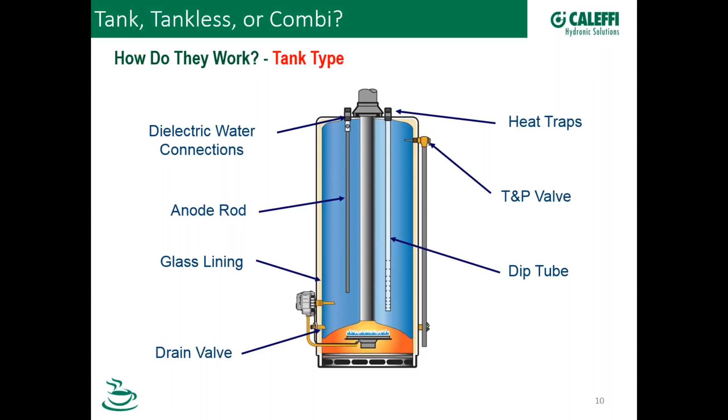One of the questions was, well, are you going to talk about heat pump water heaters? Well, I sure can. Heat pump water heaters are emerging. They're a little bit higher priced, and they have very specific parameters they need to work. In general, they work much like the refrigeration process in reverse, so instead of rejecting heat, we're absorbing heat and then transferring that into the water. We aren't really going to be talking about this in the side-by-side comparison today, but we are going to focus on tank type, tankless, and then combis.

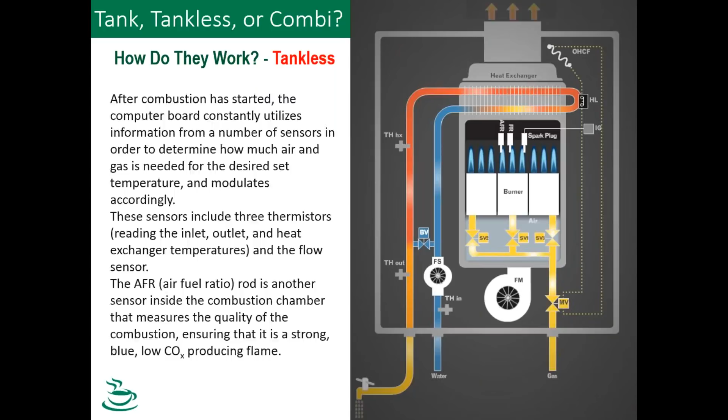Tankless water heaters, it's a singular chassis, it's got a burner. There's a lot of different makes and models, some are condensing, some are non-condensing, but they operate based on a flow rate. Once that flow rate actuates the unit to fire and says I need heat, I've got a call, let's send some hot water downstream. These are, even though it's a fairly small chassis, there's a fair amount of sophistication in there, and we'll talk about how to control them and how these actually operate.

One of the things you will hear me talk about today repeatedly is that the higher the temperature rise, the lower the flow rate. We'll talk about that in greater detail moving forward. But essentially we have a heat exchanger, the potable water directly goes into the heat exchanger where it's heated by the flame. We transfer that into the water and it goes right out to the fixture. So it is a direct fired appliance.

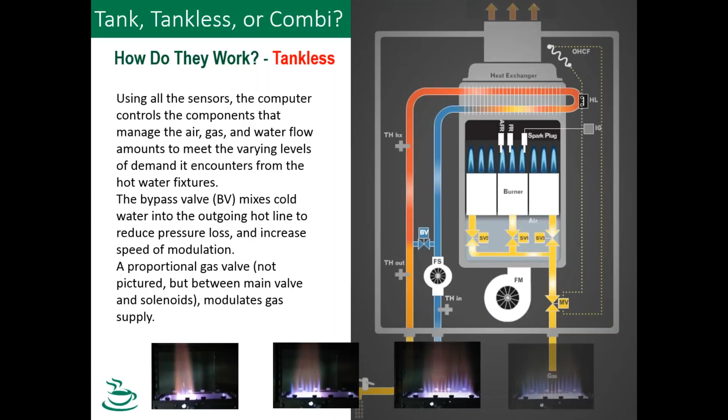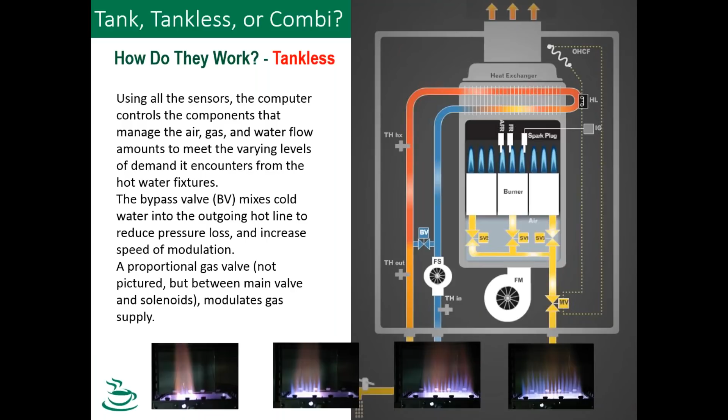This particular model, we can talk about a modulating gas valve, but some of these truly modulate and some of these have staged burners. So when we say a tankless heater, that covers a very wide spectrum, and we'll talk about specific units here in just a few minutes.

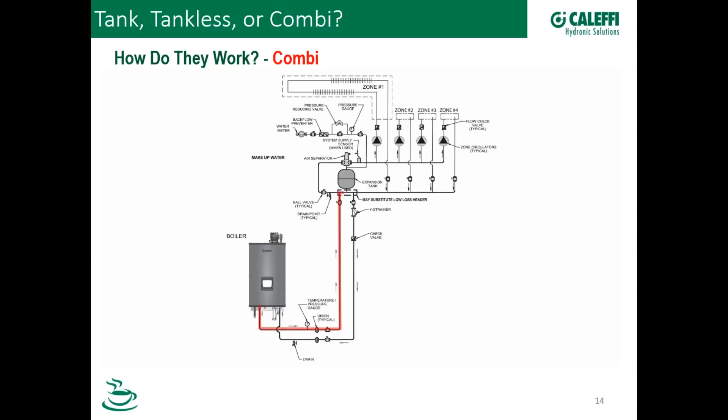And then onto the Combi. As the name suggests, a combination boiler provides both space heating and domestic water production. In this animation, on a call for heat and a space heating load, the boiler turns on, and the internal boiler pump will handle that flow. In this instance, we have it on closely spaced tees for proper primary, secondary operation, but that is how it will work as it pertains to responding to a space heating call.

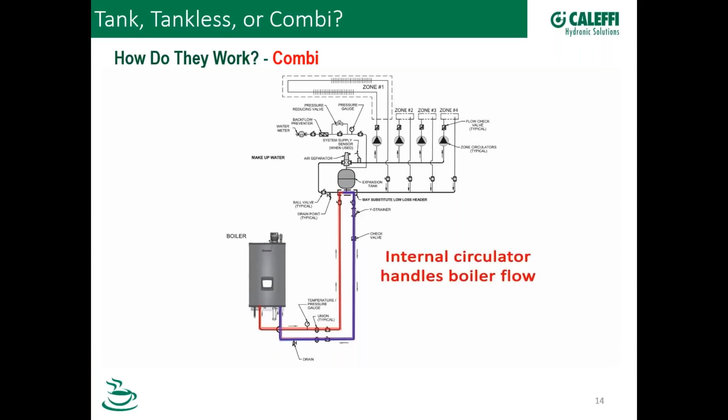Now, internal to the boiler, you will see this brazed plate exchanger and these brass valves, and there is a two-position actuator. When it actually calls for heat, you'll see that actuator spring move over to the left. As system fluid comes back from the space heating side, it will go up through the boiler via its own circulator. We'll pick up the BTUs in the combustion process, and then allow that flow to be directed right back out to that space heating load. So that is how it performs on the space heating side.

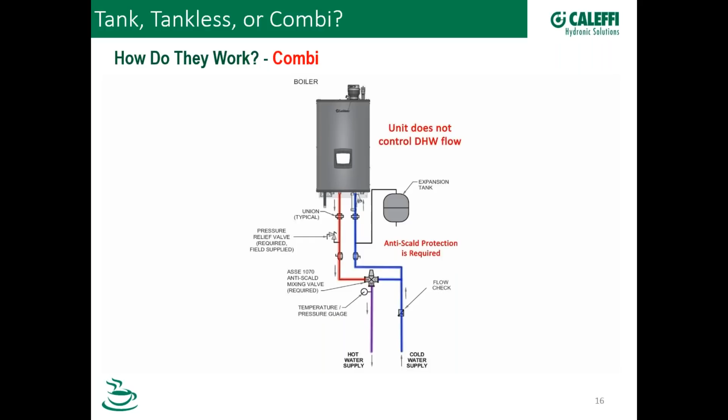Now on the Combi, on the domestic side, we will actuate a call for domestic based on a flow rate of a minimum of 0.32 GPM. So even a partially open lav faucet or kitchen faucet is going to tell the unit we need heat, and it's going to actuate flow. That same brazed plate exchanger, that two-position actuator is going to go back to the default position, and now instead of allowing flow out to the space heating side, it is only going to allow flow through the upper half of that brazed plate exchanger.

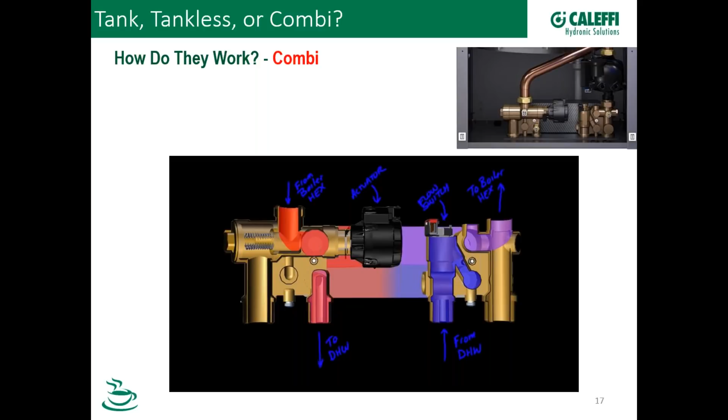So the boiler flow then becomes very circular. It goes up through the heat exchanger, down through the brazed plate heat exchanger, and we're transferring BTUs into the potable water, which is flowing through the bottom side of that brazed plate exchanger. So this is not a direct fired appliance. The potable water never touches that flame or sees a flame. We'll talk about some of the added benefits of that as well. So these three different devices work in completely different manners.

Now on to applications, and you'll see the industry really is shifting to storing water or producing water at a higher temperature so that we can stave off Legionella issues. If you're not familiar with Legionella, the bacteria, the higher we store water, the quicker that Legionella will die. If we store water at 140 degrees, 32 minutes later, that bacteria will die. And the magic number is instantaneously at 158 degrees, that Legionella bacteria will no longer continue to live.

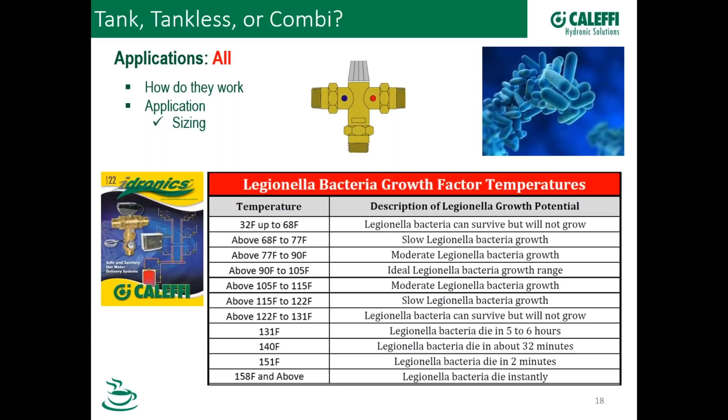So for today, we are going to illustrate the use of a mixing valve, not only on a tank, but on the tankless and on the potable side of the Combi as well. There's another reason why I'm going to illustrate this, because some of the emerging technologies out there and the components now available might play to our strengths as it pertains to recirculation, but I don't want to get ahead of myself here.

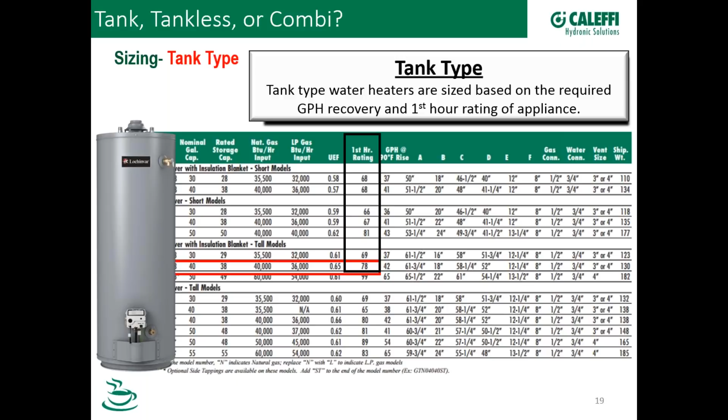So we talked about how they work, but now we're going to talk specifically about sizing. The elephant in the room for us, as it pertains to a side-by-side comparison, is we're just going to pick this model right here. It's probably the most prevalent model out there: 40,000 BTUs, tank type under-fired unit, 40 gallons of storage. So that we can compare this apples to apples, we are going to go to that first hour rating, and that is how we size a water heater. With the storage and the BTUs on board, that unit will produce 78 gallons per hour.

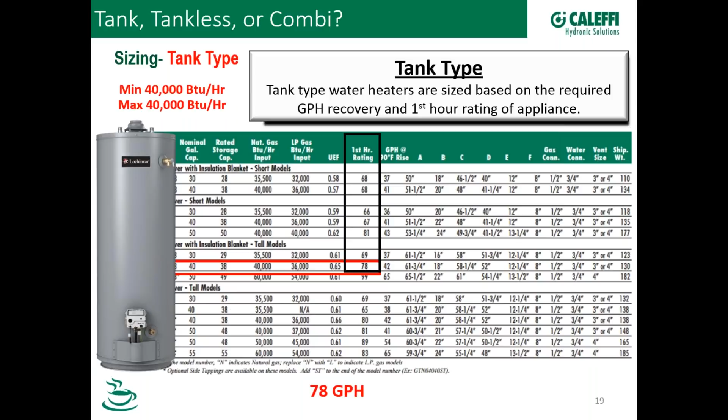Now on to tankless. Tankless is sized by peak flow rate. So we need to know what the worst case scenario is, what is that maximum flow rate for that peak load that we've got to sustain?

And for today, we're going to look at a non-condensing unit. It's 199,000 BTUs, a lot more BTUs there, and it's going to heat a fair amount of water. It doesn't hold a lot of water, but we're going to use a large number of BTUs to heat that flow. At this particular model, at a 77-degree rise, which is kind of what the industry defaults to, a 4.2 GPM flow rate will produce 252 gallons per hour.

Now that again is in contrast to the tank type heater that was 78 gallons per hour. So going back to the narrative, in a side-by-side comparison, we have a tank type under-fired heater that is only 40,000 BTUs, but we're banking on that storage capacity of those 40 gallons. Whereas a tankless, no storage involved, it has to produce those BTUs on the fly.

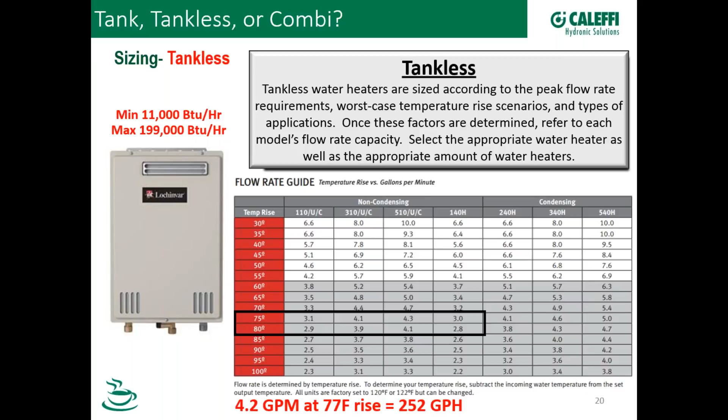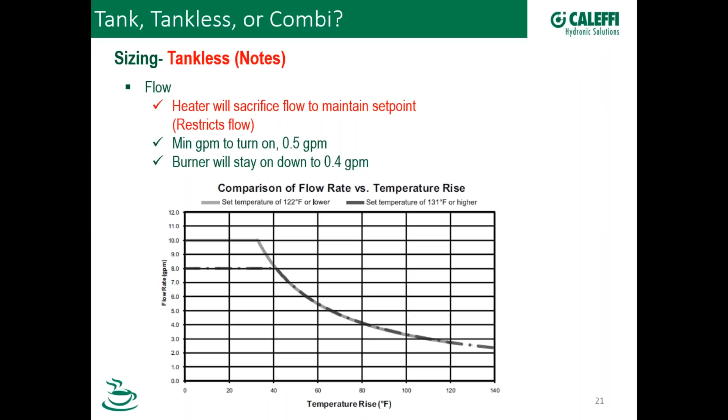So 252 gallons per hour comparatively. Hey Paul, a rule of thumb that somebody shared with me recently when I was out doing some training - they said it takes about 50,000 BTU to do 1 gallon per minute at about a 75 to 77 degree temperature rise. That's why you usually see the smallest tankless or combi unit at about 110,000 BTU input, which gets you right at a little over 2 gallons per minute instant flow rate.

That's great feedback, that's a really good ballpark number to use - 50,000 BTUs per GPM of temperature rise. The thing that is true with tankless, and I use the word generically because there are a lot of different types and styles of tankless heaters, is that the higher the temperature rise, the lower the flow rate.

So down here in this schedule, we're looking at a 40-degree temperature rise. The water's coming in at, let's say, 35 degrees. If we raise it 40 degrees to a 75-degree exiting water temperature, I'm going to get a flow rate of 8 GPM. But as we travel down this scale on this axis, the higher the temperature rise, the lower the flow rate.

In several units there is a device called a bypass and flow adjustment valve that will sacrifice flow to maintain set point. So in short, if you have a lav faucet open or a shower faucet open, it's going to want to meet set point at your delivered water temperature. If you want to deliver 110 degree water, it will deliver 110 degree water unless it's not able to keep up with that appropriate temperature rise - it will limit the flow through this device so that it can maintain set point. Again, the higher the temperature rise, the lower the flow rate.

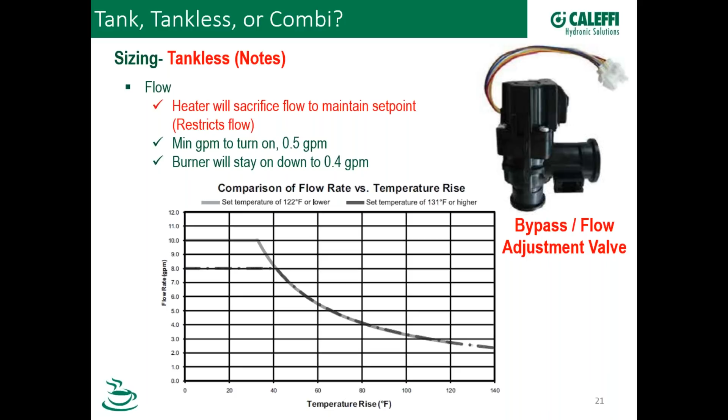We'll talk about this in detail as it pertains to commercial on my next slide. As it pertains to sizing criteria, there's a lot of things to be looking at when sizing a tankless heater - especially what is my max flow rate if all the showers were running, or if this is an empty nester, if I've got a load of laundry going and a shower, or laundry and kitchen, what is that going to do to my max flow?

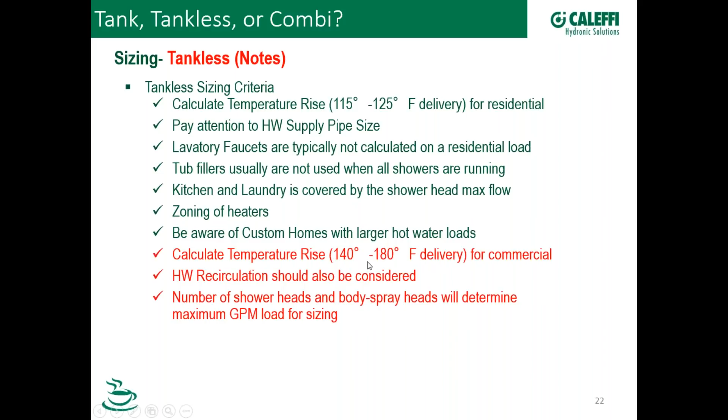So really what you're looking at is defining what that user's flow rate and load profile will look like specific to that user. But there's a lot of disparity between the criteria for residential versus the criteria for commercial heating, so that turns into a completely different animal at that point.

And this drove a very big question from a lot of you out there - what is that line of demarcation? If I'm going to do a commercial application, how many heaters then become cost prohibitive? Because I don't have any storage, I need the greater number of BTUs and the greater GPM capacity because there is no storage.

But again, we go back to that same narrative of the higher the temperature rise, the lower the flow rate. Here on this blue line, I'm showing a 40-degree entering water temperature, and down this axis, the higher the temperature rise - if I want to deliver 135 degrees, that's going to limit my flow rate. And that would then drive a larger number of units.

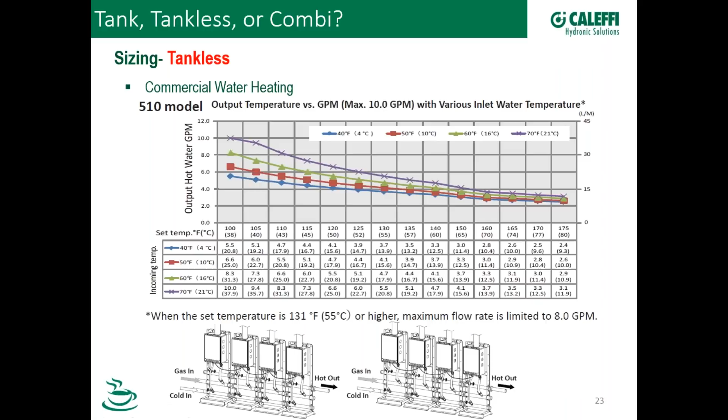Now this next slide addresses that question: how many tankless units should I consider before moving up to traditional sizing methods that include storage? This is a very subjective question - this was one that came from a pre-submitted question, and I did some legwork as it pertains to what is the best answer.

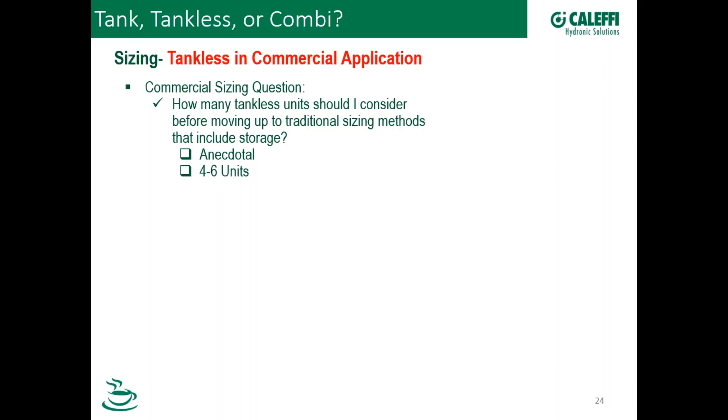I don't think there's a single correct answer here. But anecdotally, I solicited information from a lot of contractors in Texas and California. In a commercial application, a lot of them would say if it takes more than 6 tankless water heaters, I would pretty much move up to a traditional forced circulation system with storage.

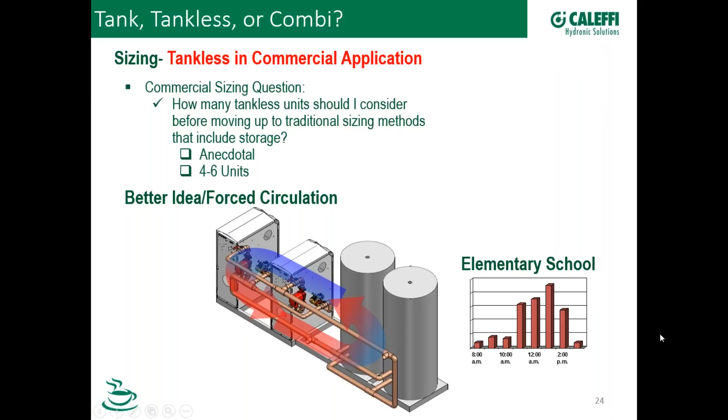If you think about the water usage patterns of an elementary school, there are no large banks of showers. There's generally only a kitchen load right after the lunch hour, so that gives us our peak demand. That's very simple to size for with tankless water heaters because we can meet that modest GPM capacity. We don't really need storage.

So in this instance, maybe we have 250,000 BTU heaters and 200-gallon storage tanks, whereas without storage we might need 12 to 15 to 18 tankless heaters because we have to size for that peak recovery in GPM.

So we've been doing this a very long time. We do forced circulation with storage, and it does meet the need. But again, in this iteration, we can talk about a large number of tankless heaters then being required. But that number of tankless heaters would then need to be serviced every year. We have to deal with the venting requirements of 12 to 18 to 15 heaters, gas piping, and so on.

So we need to keep it back to the basics of first cost. Is my first cost advantage installing 12 to 15 heaters with the venting and gas piping, and then servicing and maintaining them every year? Or would 2 larger tanks, as it were, storage and smaller heaters be more appropriate? Would that be a better economy of scale, if you will? So these are the questions at hand.

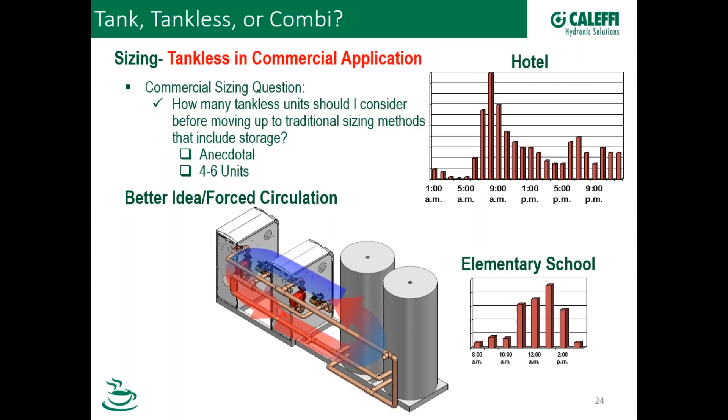I'm sure at the end of this presentation that will generate quite a few more questions, so I'm glad to address it further.

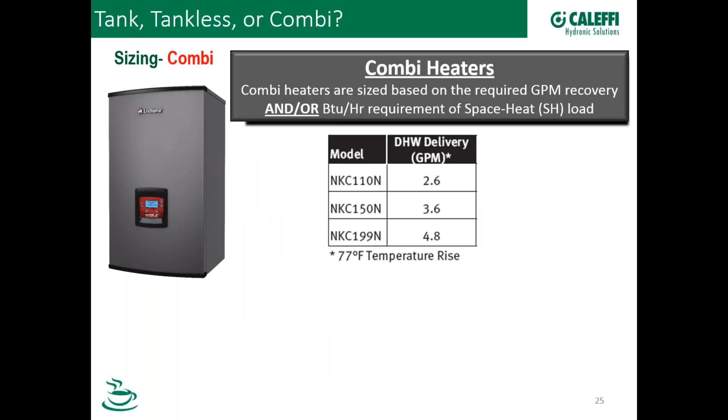Now on to Combi heaters, and as the name implies, we have a couple things at work here. We have the potable side, and with a 199,000 BTU heater, we can divert flow from the space heating side that you saw in that illustration, that animation, and we can supply up to 4.8 GPM at a 77-degree rise. We can do that all day long. So that 4.8 GPM at a 77-degree rise gives us 288 gallons per hour.

And again, that is in contrast to the 252 gallons per hour of the tankless heater and 78 gallons per hour for that first hour recovery for the tank type heater. Again, we're talking about a 199,000 BTU boiler and water heater versus a 199,000 BTU tankless versus 40,000 BTUs for the tank type. So as a true side-by-side comparison, the largest BTU capacity, or rather the largest GPM production for domestic water, would go to the Combi.

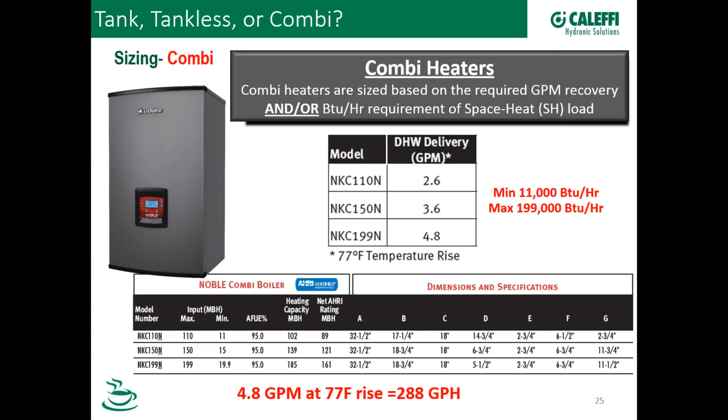We'll revisit this slide when we start talking about the trade-offs, and we'll sum it all up as we move forward. Now piping is very straightforward. With a tank type water heater, if we're just doing standard non-mixing, it becomes very easy to pipe. But even a simplified mixing valve, a hot-cold mix principle if you will, is very, very straightforward.

I think most of you would then adjust your mixing valve with a thermometer, saying I want to deliver 110-degree delivered water temperature. So we might choose to store at that 140-degree temperature, knowing that in 32 minutes we're going to stave off any Legionella issues. That's very practical at that point.

But I like showing the mixing valve especially because some of these new components out there in the industry, I think, have the ability to groom and shape what we do as an industry. Bob, you can jump in and describe this, but this is new from Caleffi. I'm only seeing it now in the industry starting to saturate—it's a built-in mixing valve that offers a lot of value. So we're doing a hot-cold mix principle, but it will greatly simplify piping, I believe.

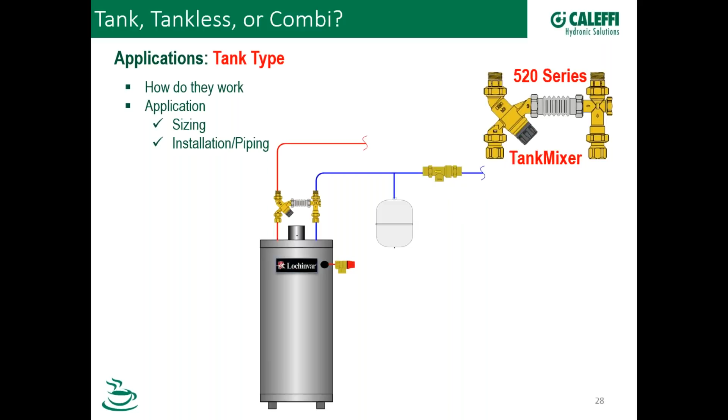Yeah, that's another, not product specific, but that's what we call our tank mixer kit. It comes just as you see it there with an angle version of a thermostatic mixing valve, which is nice so you don't have to make that big curlicue on your piping to cross over to the other side, where we've got that cross T that you can also bring your recirculation right into. It's really quick and simple. The union connections, you screw it onto your two connections coming out of the tank, set the temperature you want, and away you go. It's a really nice application, and there it is in a tankless.

I think it's a great application for the tankless as well as the Combi. One of the questions generated was, in contrast to how we heat water in the United States, how most of Europe and the rest of the world heat with tankless. Well, in Europe that's a dominant hydronic market, and you'll see a lot of boilers and indirect heaters there, at least in Western Europe. In the United States, the opposite is true, where the dominant source of hot water is a tank type under-fired heater. So to answer this directly, in the rest of the world, yes, a tankless water heater is a really dominant factor in Asia and Eastern Europe as well.

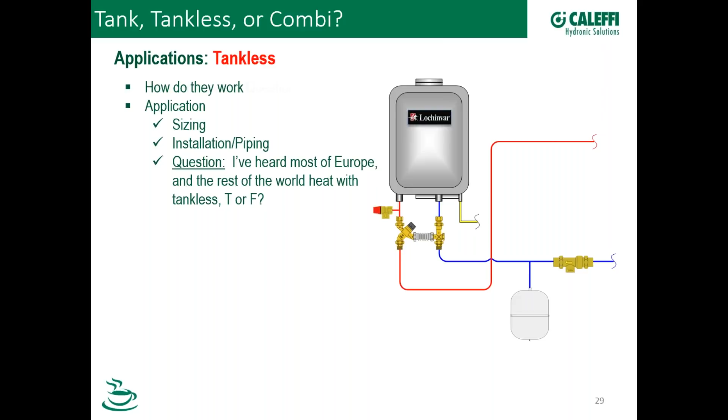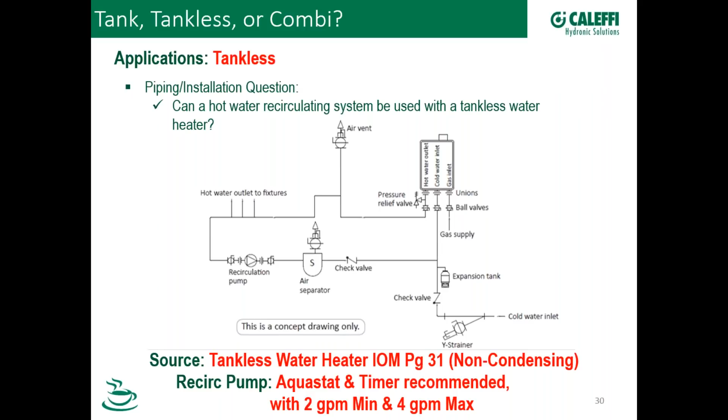So tankless water heaters, they're here to stay. Absolutely. Another question we received was, can a hot water recirculating system be used with a tankless water heater? Absolutely, we have it in our manuals, and we've gone to great lengths to illustrate this, but there are a couple caveats. To heat water successfully and do recirculation with especially a tankless, there are some parameters: we want to see a minimum flow rate of 2 GPM so we can properly actuate flow, and a maximum of 4 GPM. In that recirculation circulator, we also want to see the benefit of an aquastat and a timer. I think that, as laid out in the manual, will give us very good reliability for circulating hot water at given times of the day.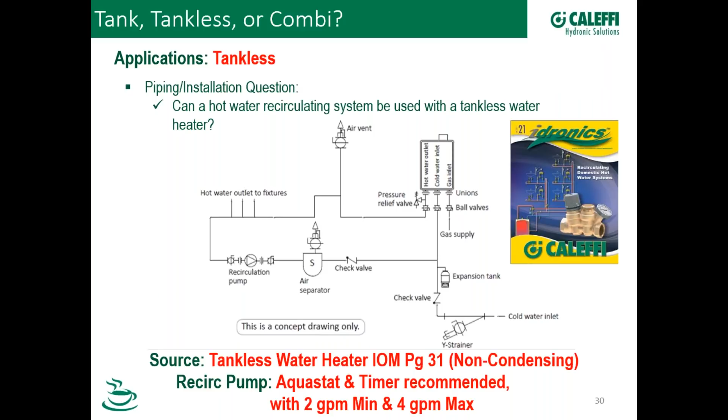We'll address this a little more fully here in a minute. This is, again, a great resource. If you don't have this idronics 21 manual, I refer to it a great deal, because navigating proper recirculation piping can be a little tricky. Just the misplacement, or having one check valve misplaced, can really leave you scratching your head.

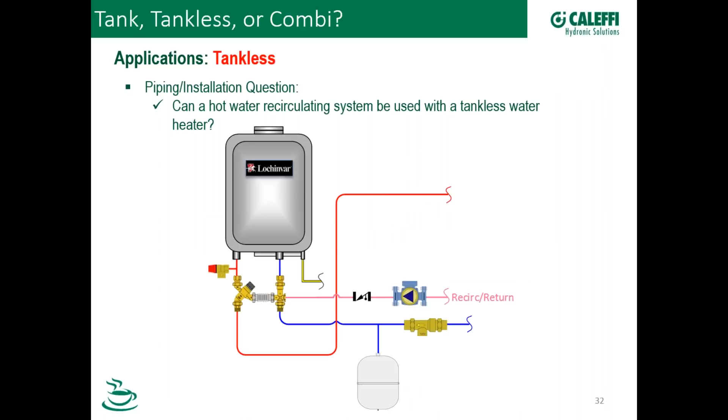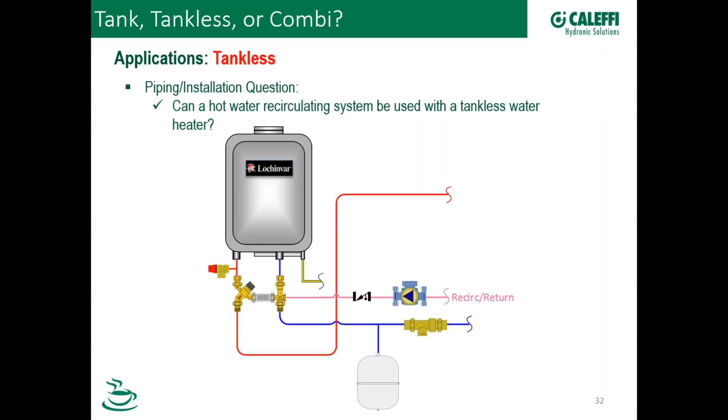So then on the potable side of a Combi, in terms of piping, we've got a lot going on here. But if you break it down into modules, it becomes very simple. Over here is my potable side that you saw earlier, my hot-cold mix principle: potable water actuating flow, hot water coming out to the mix, I'm mixing my cold water back in, and here's my delivered water temperature to the potable side. So the duality of a Combi boiler is that I'm also providing space heat.

Here I'm illustrating a primary secondary operation, and what that means in layman's terms is flow in my system loop over here is not going to induce flow in my boiler loop. What is true about this Combi boiler is that behind that jacket there is a circulator included with this appliance. It's pre-built in, it comes with unions, so flow in my dedicated boiler loop does not induce flow in my system loop. This is shown with a SEP4, a 4-in-1 separator.

And it has the benefit of providing duality and redundancy, because it's not just hydraulic separation, it's air separation. There's media in there that provides dirt separation. And down below, there's a magnet that gives magnetic separation. So these are very popular in the industry right now, especially if you're doing primary, secondary.

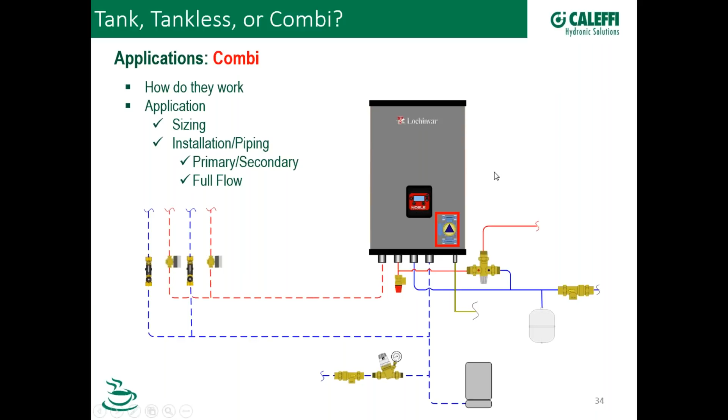So that same instance, can a hot water recirculating system be used with the Combi? Absolutely, for certain. That's again, we would like to see that with min and max flow rates, as well as a timer and an aquastat.

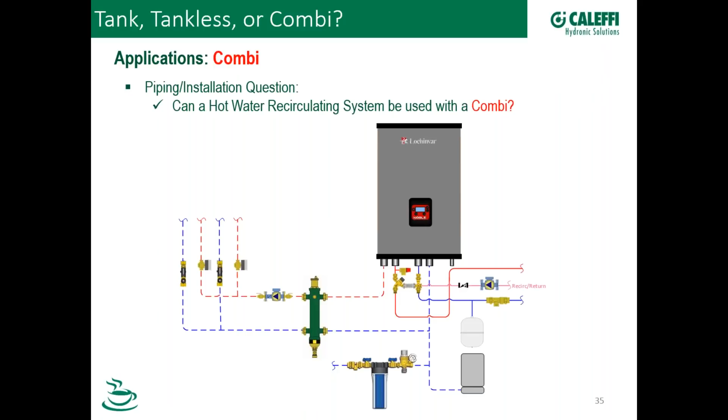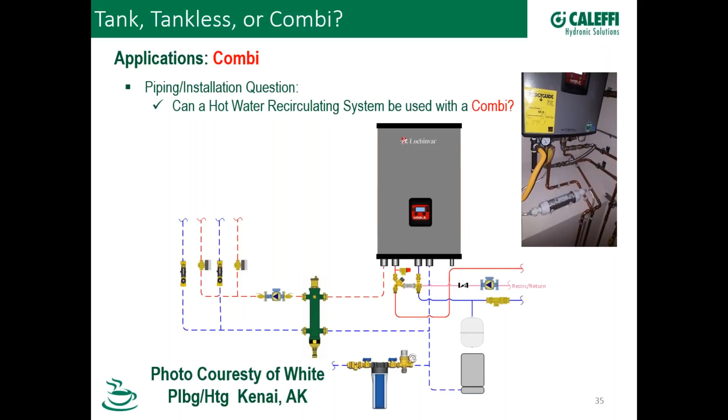And we'll talk about another feature of a Combi as well. This picture up here on the right came to us from Nate White Plumbing and Heating in Kenai. It's a Combi boiler with that mixing valve, and Nathan usually stays pretty cutting edge. He's on top of it, so we've always appreciated his install pictures as well.

So there's the bottom side of that. Again, greatly simplifies that piping.

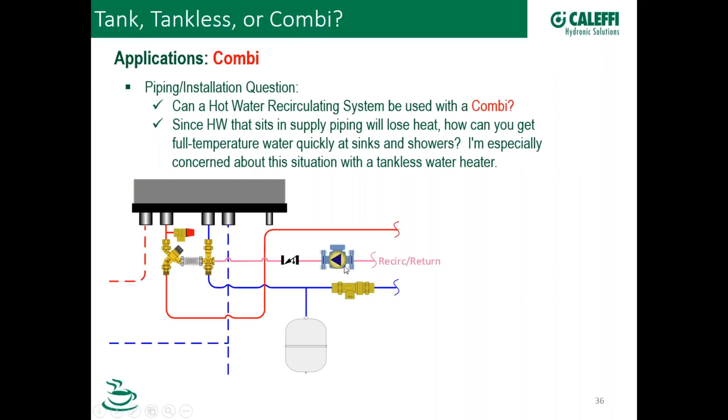But one of the questions that came to us was, and this is a very legitimate question, since there's hot water in the pipes, they lose heat, even if they're insulated. How do you get full temperature water at sinks and showers, out in the load, at the fixtures? This person was especially concerned about this with tankless water heaters. And again, this is true with tankless as well as Combis. That's an absolutely true statement and a true concern.

We call that a cold water sandwich. So if you think about it, what the author of that question is saying is, unless I have flow through this unit, I'm not delivering hot water out to that system. If my recirc pump is not operating, the water that is stagnant or dormant in those pipes and the potable going to the fixture, that water is not moving and it's losing temperature.

And when the unit gets a call for heat, there is a process, a pre-purge, a lighting off, stabilizing the flame before we start delivering hot water. So you get cold water going out, then a source of hot water, and then it's surrounded by another slug of cold water after it's all off. And we call that a cold water sandwich.

Well, to counter this with Combi, we have what's called a Combi preheat function. And it's very interesting. The Combi preheat function keeps that boiler and the brazed plate heat exchanger at a predetermined temperature. And this is completely adjustable.

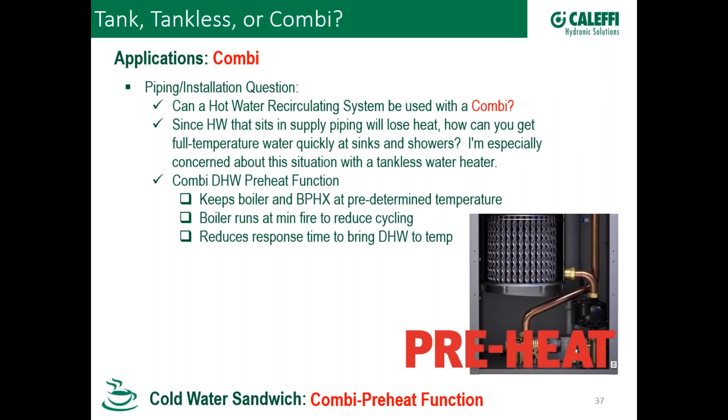So the boiler runs at a minimum firing rate to not only reduce cycling, but prohibit that water from cooling off in the line, provided it's in sync with that recirculation pump. This reduces the response time of delivering hot water to the fixture, and this is a very valuable feature. So that Combi, as opposed to the tankless, can stave off these types of issues and address that fully. I think that's very important.

Now, moving on, water chemistry is a very important topic, whether it's on the space heating side or on the potable side. Water chemistry is a big deal.

I was flying out to Vegas a while back, and as I looked down at the prominent dam out there, Hoover Dam, the water level was going down, and this residue was left. You can see where the high water mark was. Well, that residue is actually calcium and magnesium, those are hard water deposits. And where do you think those hard water deposits are going to end up? Well, they're going to end up in a tank type heater, a tankless heater, as well as a combi.

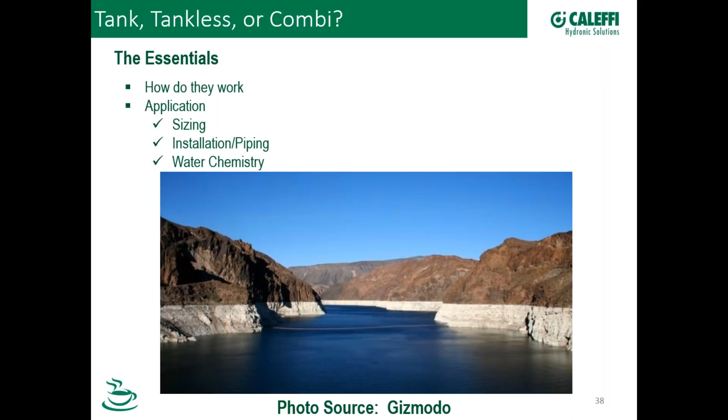So we need to talk about what the parameters are for each of these units. It was very illuminating to me that with a tank type under-fired heater, there really are no parameters. You won't open up the manual for our Lochinvar water heaters and see a minimum grains of hardness or TDS, total dissolved solids. The only parameter is that it must meet the verbiage that EPA has defined as potable water. As long as it conforms to potable water as defined by the EPA, there are no minimum standards of water chemistry for tank type heaters.

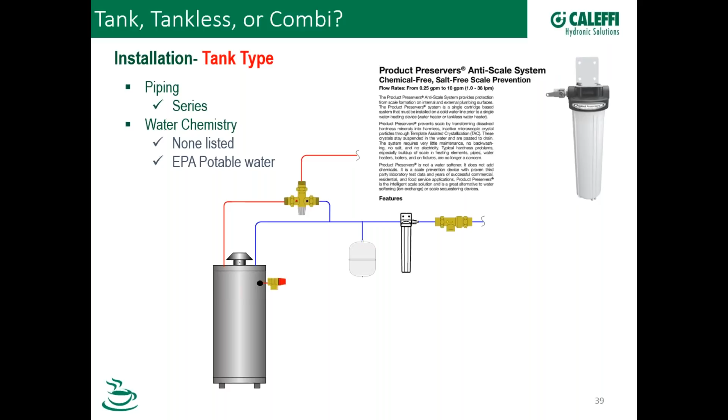If you do some due diligence and legwork online, Google water chemistry for tank type heaters, this is what you'll see. You'll start to see these third party or ancillary items that illustrate how, if you pipe them in with the heater, you can extend the life. In other words, it won't lime up, heat up, and scale up as quickly. So these are very interesting. The widest or most generous of these in comparison would be the tank type heater, because there is very little, if any, water chemistry parameters.

Now, to a tankless water heater, it becomes very real. Remember, these tankless heaters do not hold a lot of water, so unless we're moving that water through at a very high velocity, we have to look at the minimum and maximum grains of hardness. 7 grains of hardness is our maximum in a residential application, 4 grains of hardness in a commercial application. If we're beyond that, we need to bring softened or conditioned water into that tankless heater. Also, in a tankless you will see a defined pH. These are the minimum and maximum parameters for tankless water heaters. It also states in the manual that well water must be treated. So tankless has some very clearly defined water chemistry parameters.

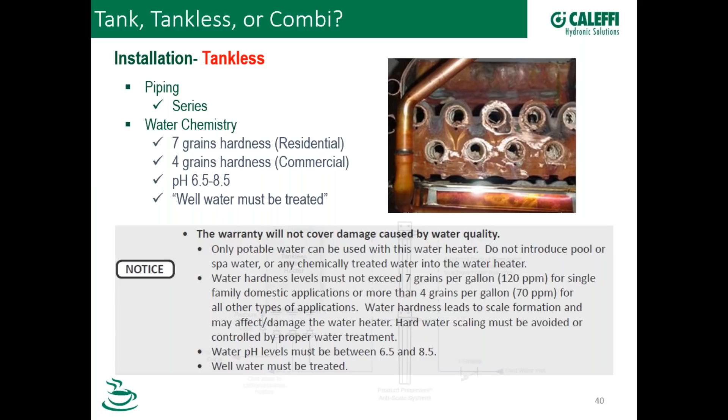Again, you can deploy those same types of devices to provide conditioned water to prevent scaling. And then on to the combi, which gets a little more involved as it pertains to water chemistry, because we have 2 sides of that heater: the boiler side and the potable side. So we have some very real parameters here, between 5 and 12 grains of hardness on the boiler side. And on the potable side of that brazed plate exchanger, the same was true as with tankless or tank type heaters - it only has to meet the requirements as defined by the EPA. As long as it passes that, it's absolutely fine to run it through the domestic side of that brazed plate exchanger. And then on to total dissolved solids, we have very clearly defined parameters there. So a very defined bandwidth of water chemistry between tank type heaters, tankless heaters, and combis.

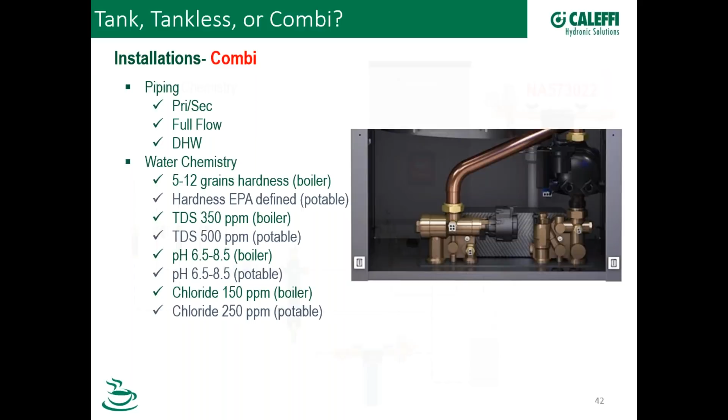So not only on the potable side of a combi, you're now starting to see the saturation in the industry of conditioned water on the fill side. Now, this is a fill valve. On the space heating side, as that system fluid heats up and entrained air leaves via the air separator, we need to replace that volume with more water volume at a constant fill pressure. So the fill valve not only reduces pressure from your city main, it maintains a constant fill pressure and keeps that static system pressure at a constant level.

Now you're starting to see these devices provide conditioned water. Any water that enters that system will now be conditioned.

And Bob, you can sure add in whatever you want to at this point. No, you're doing a great job.

Thanks, that's exactly right. That's just additional fill water. Obviously you want to fill the boiler the first time with good quality water, either demineralize it on the job site, or bring some water with you if it's outside of that spec. This is just a little replaceable cartridge unit we offer to go on the fill water, so any water that leaks out or air that purges out and needs to be replaced, this will assure that makeup water is also conditioned.

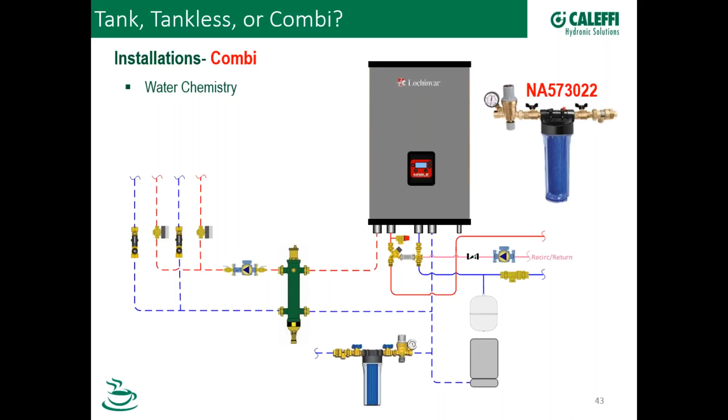So thanks for the plug, Paul. Absolutely. And then on to controls.

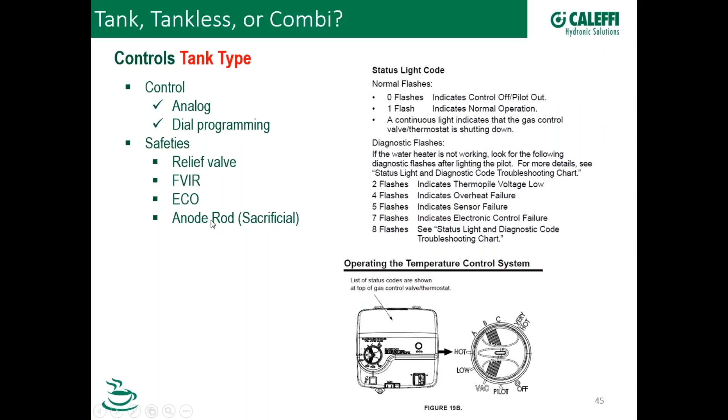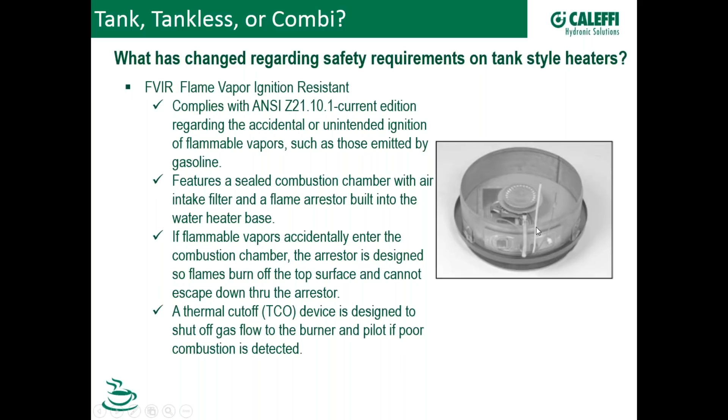One of the questions that came up was what is really new and innovative as it pertains to safeties on tank type heaters. With the new ANSI standard, you see these flame vapor ignition resistant burners that have entered the market. These have been out a few years, and this shouldn't surprise anyone, but they've done a very good job getting us to a point where if some liquid or combustible was to be nearby or splash onto that surface, it will provide an emergency cutoff. So a lot can be said about a 20th century technology, but now with 21st century safeties, even on a very modest tank type under fired heater.

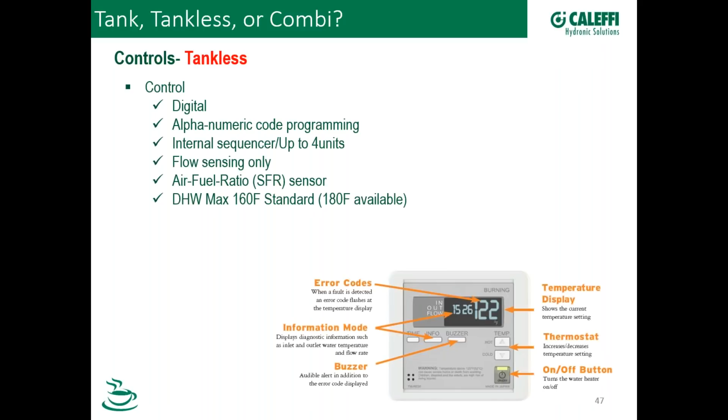Moving on to tankless, we get a little more sophisticated with digital control, some alphanumeric codes. We do have some flow sensing - again, we're adjusting flow, sacrificing flow to meet set point. There is an air-fuel ratio sensor, a fair level of sophistication monitoring the combustion going on within that tankless water heater. So it's pretty sophisticated now.

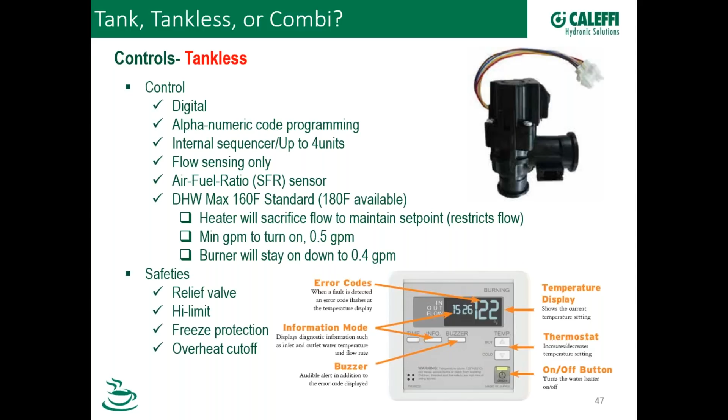But just remember, what's always going to be true is the higher the temperature rise, the lower the flow rate. That modulating valve is going to back off and restrict flow so that we can maintain set point. That's a fair level of sophistication and controllability. And again, a very great amount of safeties here as well, an appropriate amount of safeties.

One of the questions from the audience was, can I use a tankless water heater as a boiler? Well, that is a loaded question, and the answer would be yeah, but if you look at what that heater was designed to do, that tankless water heater was designed and certified under ANSI Z21.10.2. It has a different set of criteria than what the boiler was designed to do. So the performance from each of these appliances is completely different, and the standards they're tested and certified to are completely different. A tankless water heater really handles higher pressure, moderate temperature, and wider delta T's.

In other words, a pretty high temperature rise. The boiler, on the other hand, is the opposite - a little bit lower pressure, lower temperatures, and a much narrower temperature rise or delta T through that unit. So that is a loaded question, that's for you to decide, but I'm tempted to use the analogy of buying a Ferrari, getting in, pushing the accelerator to the floor, and then using the brake to control the speed. Well, I can do that - it's just not really what it was designed to do, but yeah, absolutely you can do that. I understand that's a bit of an exaggeration, but look at those appliances, what they were designed to do, what they're certified to do, and move forward responsibly from there.

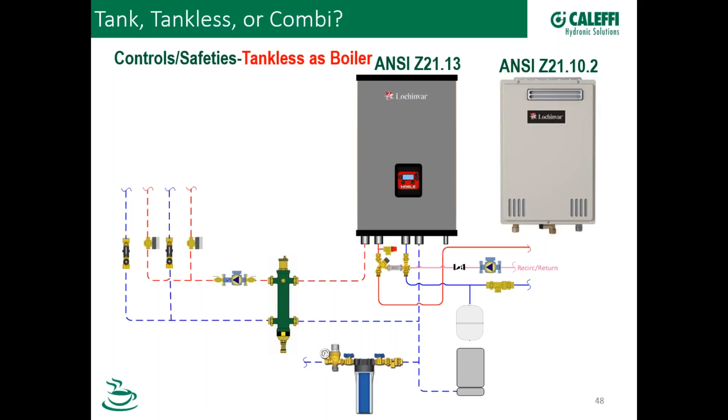Responsible design is important. And then on to control with the Combi, a fair level of sophistication, plain English programming, digital. We can sequence up to 8 units together that will function and rotate, lead lag, so we'll get equalized runtime between all of these.

One of the new things out there with the Combis is we're basically electronically derating it for space heating load. What that's essentially saying is, I've got 199,000 BTUs available on the chassis of that appliance, and I want that full complement of BTUs for my domestic water production. But on my space heating side, if I've done my load calcs or a heat loss, maybe I only need 80,000 of those 199,000 BTUs. I can electronically derate that appliance so when a space heating load is applied, it only fires to 80,000 BTUs, or whatever that percentage firing rate is. But when the domestic water calls, give me that full complement of BTUs. So a fair level of sophistication here.

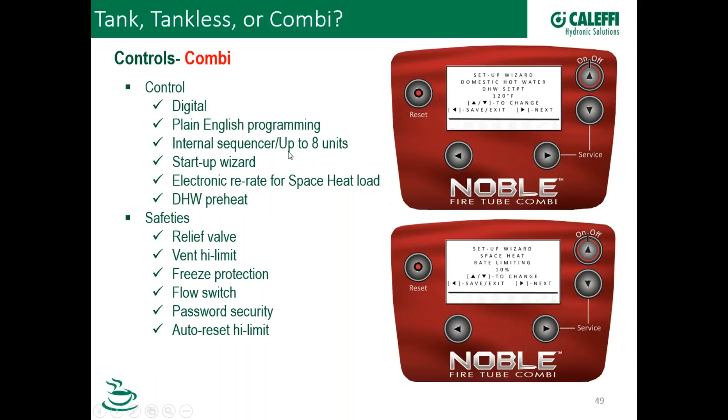We talked about that domestic water preheat on the Combi. These are all important, and again a fair number of safeties as well. So we go from analog to digital and anywhere in between as it pertains to controls.

Service is a very difficult topic to really do in a modest amount of time. But if you look at it in a side-by-side comparison, I'll illustrate an electric water heater here. This is gas-fired with a burner. Electric water heaters have elements and some thermostats here.

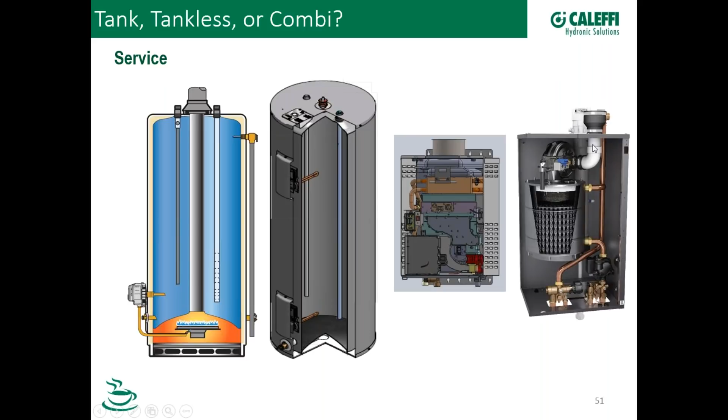But then you look at the plenum of a tankless water heater and the plenum and serviceability of a Combi, and to do a side-by-side comparison, you look at the number of components and the ease of accessibility. If you look at a tank-type water heater, the market is saturated with these parts: a relief valve, the burner, the gas valve which has the built-in emergency cutoff, dip tube, anode rod. There's a really modest number of parts, and your access and ease of service is pretty tremendous. I think it gets the tip of the hat in this side-by-side comparison.

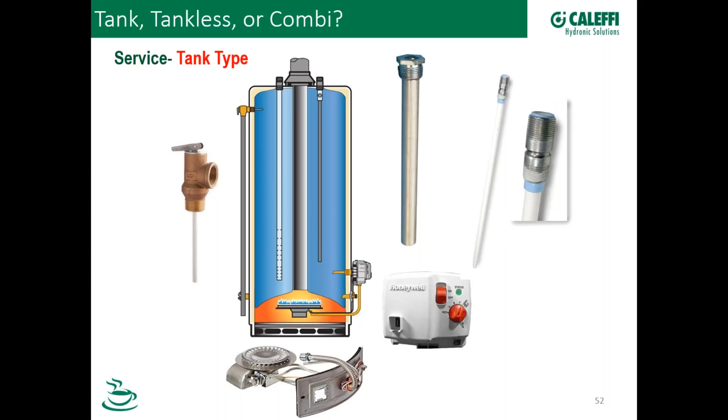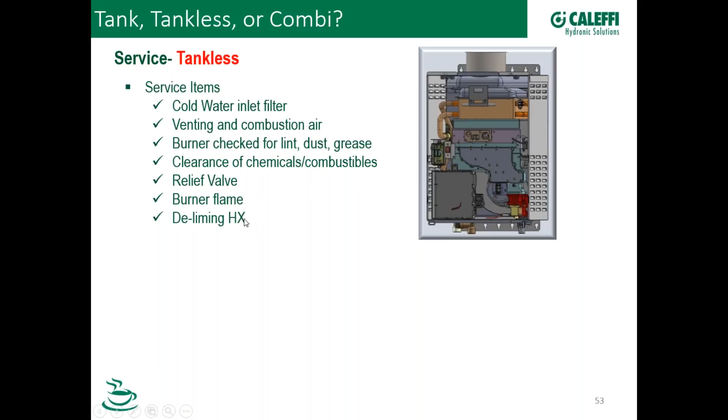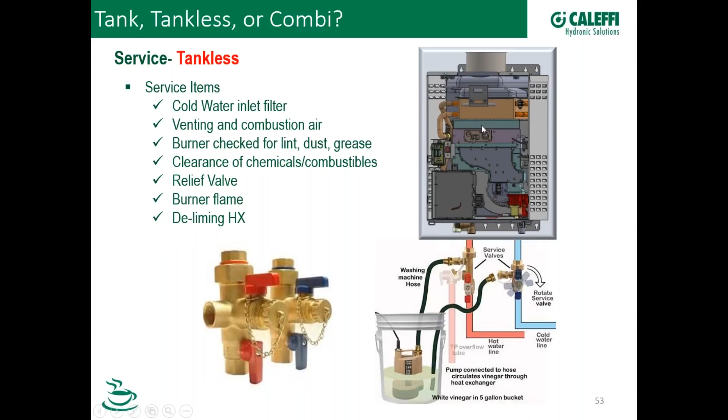Moving on to a tankless water heater, it becomes a little bit more involved. It's not an impossible task - obviously these are intended to be serviced. But there's your list of basic service items: filter, venting and combustion air. You're going to go through all this list and potentially de-lime that heat exchanger. If you've got aggressive water chemistry, you're going to need to de-lime it. Based on that installation process, if you go ahead and install these types of service valves, it makes that de-liming process very quick and simple. So again, very easy to navigate and service. Look at the architecture and the area where your hands are going to be, what components you need to replace, and you can make your own decision from there about serviceability. A little bit more involved than a tank-type heater.

Now on to a boiler. Again, you've got one appliance functioning as both space heating and domestic water, so we've got to look at both sides. We're going to service and clean the combustion chamber, check gas pressure - hopefully there was a combustion analysis done when the boiler was set up. On the potable side, you can de-lime that heat exchanger.

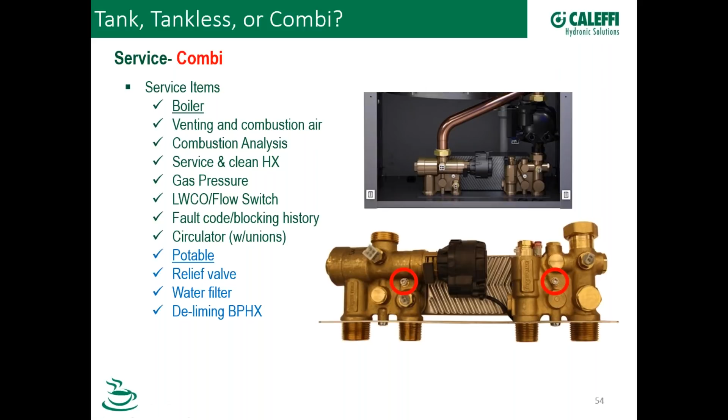What's been interesting is, on the back side of these brass valves, that's where that braze plate heat exchanger is. If you were to loosen and remove these two Allen screws, that basically disengages the braze plate heat exchanger. The posts on the back side are not NPT thread or male pipe thread - they're basically posts with O-rings, so it's self-sealing at that point. Just by loosening these two screws, you can remove that braze plate exchanger, de-lime it, maybe take it back to your shop, de-lime it and put a new one in and just continue to replace them, managing your time very well. So that's been a new feature - you can de-lime them just like you can a tankless in place. But again, serviceability and navigating that architecture is very simple.

We're very proud of lochinvaru.com - it's a separate website, forward-facing. You can navigate to lochinvaru.com, go to the instructional videos, and spend 4 or 5 minutes to learn how to service, access, and clean that combustion chamber. How do you do a combustion analysis? Very granular, very digestible videos on how to service this appliance. So I think in terms of serviceability, getting in and out of the cabinet, we've made it as simple as possible for a Combi boiler.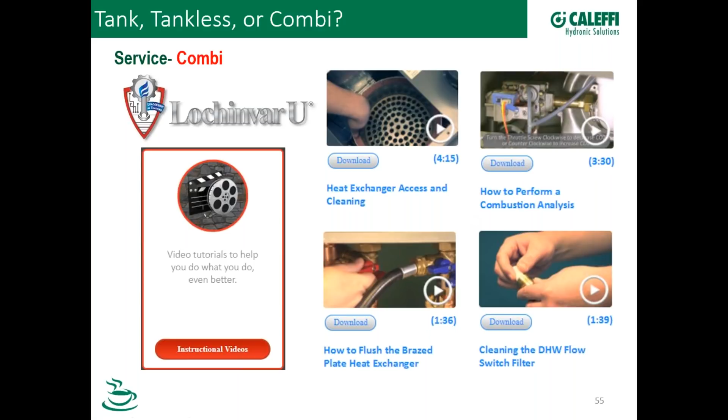Now we're getting into a very subjective area where this was requested as a side-by-side comparison. The request was that we look at these three questions, cost-wise: tank type versus tankless versus a Combi. Is that a wash these days, yes or no? How about an honest, no sales comparison? I'm going to do my best to be transparent here.

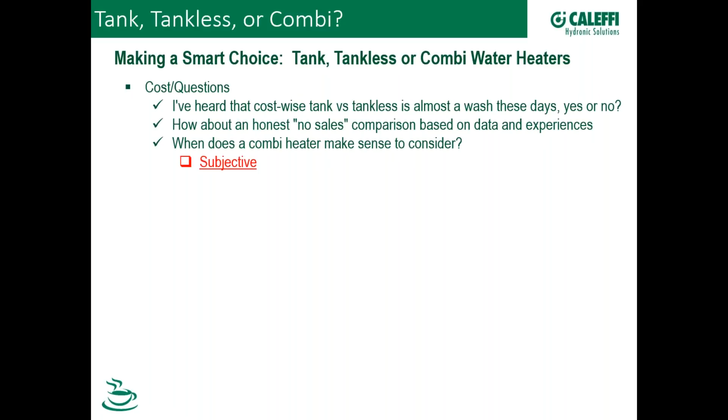And then finally, when does a Combi heater make sense? So moving forward, we know this is a completely subjective topic. There are differences from one contractor to the next as it pertains to overhead, there's code body issues, whether International Plumbing Code or Uniform Plumbing Code, and there's regional differences in terms of pricing. So knowing that, I'm just going to ask for your patience moving forward.

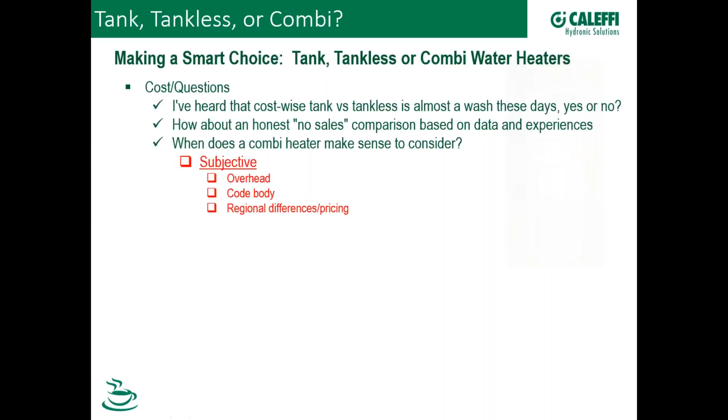So in this narrative addressing cost, we have our first tank type water heater, 40 gallon, 40,000 BTUs. In an installation, if we were to replace it side by side, a cost that came to me—these were all generated from a very responsible, very well-respected contractor in the industry—that contractor, knowing they didn't have to rework any venting, my ancillary costs, and maybe if they wanted to add a mixing valve or if there were fittings involved, plus or minus, that might have a bearing on these costs. But a basic, middle of the road, like-for-like replacement, they're suggesting an $1,100 price.

And I know this is very subjective. The efficiency rating with that is the UEF. Now this might surprise some of you, but the industry has really shifted. That UEF is the Uniform Energy Factor, and this is now the new metric that replaces the older EF rating. You used to just see an EF rating; now you will see the UEF rating, Uniform Energy Factor, and it's at 0.65 on this unit.

Moving on, here's again where we want to clearly define what's going on in that market. If that end user, Mrs. Jones down the street, wants to yank out that 40-gallon, 40,000 BTU heater and replace it with a 199,000 BTU tankless water heater—this would be an indoor model, 199,000 BTU—that moves us up to a Cat 3 venting. You allow plus or minus $200, plus or minus 2 hours of labor. This would be a suggested replacement cost. It becomes a little bit more involved. And with that, you get an 80% UEF rating with that indoor, non-condensing model.

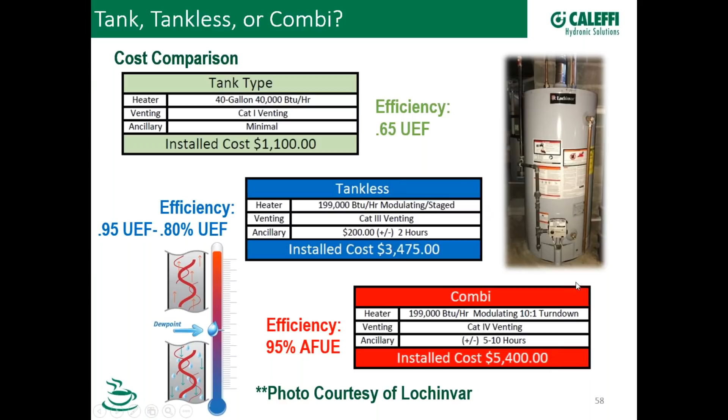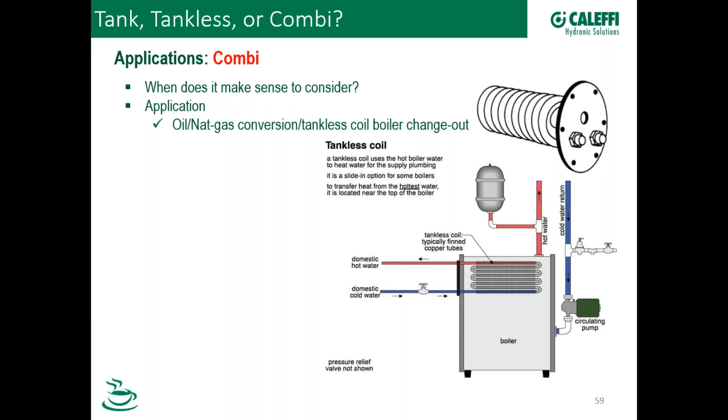When, again, addressing that—when does it make sense to change out or change to a Combi? Well, one of the scenarios that might play out would be an old boiler that has a tankless water heater, or rather a tankless coil in it. So that appliance has a fair amount of water. Typically these are cast iron sectional appliances. It has this tankless coil in it, and that's where that potable water lives. So that boiler has to stay hot 24/7 and be ready for a demand of domestic water through that coil.

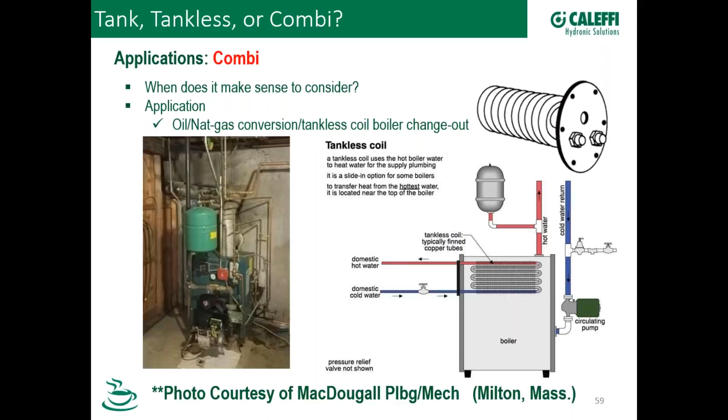If you're replacing out a Combi boiler for both space heating and domestic water production, this then becomes a natural fit for a Combi. Another instance would be a conversion where you have a boiler for space heating and a separate tank type water heater for the domestic load. If you're changing these out, maybe you replace the boiler and hook up your space heating side, and then eventually when the domestic fails, you bring that piping over to the Combi. Now you've got a 95% efficient appliance in a singular chassis that is going to do very good things for you. So it depends on the application.

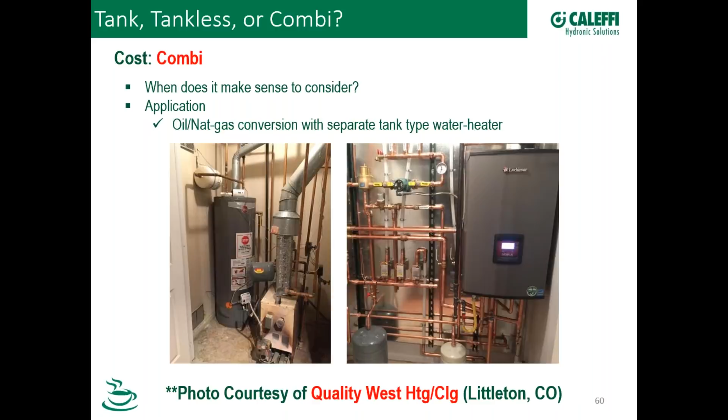Now, finally, we're getting into the final few slides here. We're doing pretty well for time. But to be completely transparent, side by side by side, I don't want this to be a gradation, but essentially I have to go in.

In terms of DHW production, what we saw was first hour recovery with that 40,000 BTU heater was 78 gallons per hour. The tankless heater was 252 gallons per hour at that 4.2 GPM flow rate. And then that Combi was capable of 4.8 GPM or 288 gallons per hour. So in a side-by-side comparison, they function completely differently.

Applications. Again, the Combi, the singular chassis, can provide both space heating and domestic water. We talked about using a tankless as both a heater or a boiler. Again, certified for design to do different things. Same thing is true with a tank type heater.

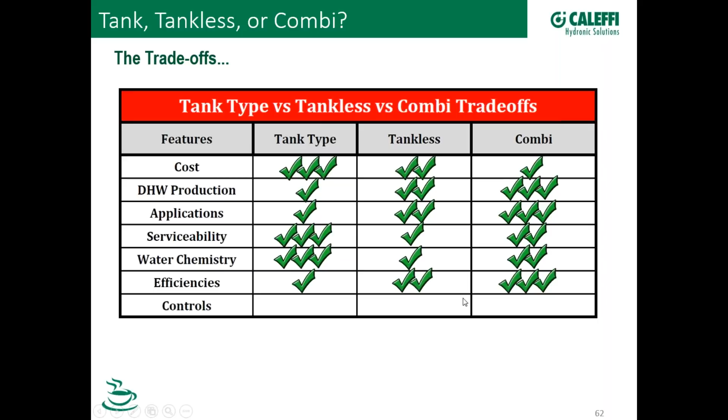Efficiencies, again, this is very weighted, the UEF number versus that efficiency. And again, I realize and fully accept that we can get some tankless heaters that can get pretty high efficiency as well. Along with that, I will say, look, these were designed by the respective ANSI standard. So the design criteria was completely different for each of these categories. So again, we got to know that that's the elephant in the room here.

Finally, in terms of controls, we went from analog to digital and everywhere in between. So in terms of programmability and functionality, yeah, that Combi is designed to do a great deal of things. So I hope you will agree that this is a fair representation. This is not a good, better, best, because I fully realize this first row right here might be the biggest barometer, the biggest single driver of what that replacement market might look like.

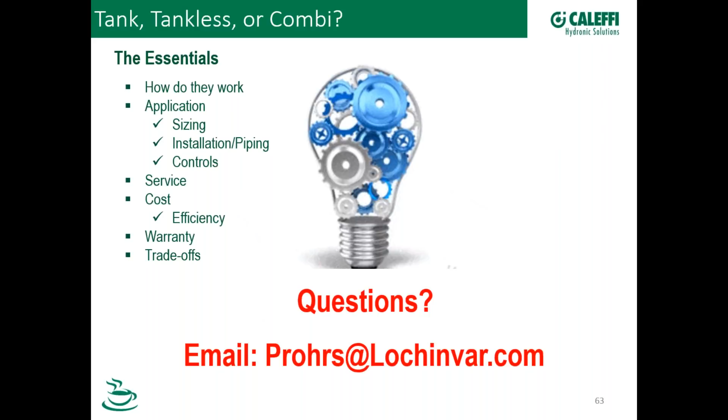As it relates to producing domestic hot water, when you're using either a tankless or a Combi, a question came in: what conditions can cause the delivered temperature of the water to either be higher than set point or lower than set point?

On the boiler side, or even on the tankless, or the Combi, the Combi allows for a set point on the potable side of up to 180 degrees. The reason we allow that is maybe we do want to use that mixing valve. So in terms of that hot-cold mix principle, if on the boiler side I can produce through that heat exchanger and send on the downstream side of that potable heat exchanger through that anti-scald mixing valve that we saw that animation on, if I do the hot-cold mix principle, I can extend that water volume.

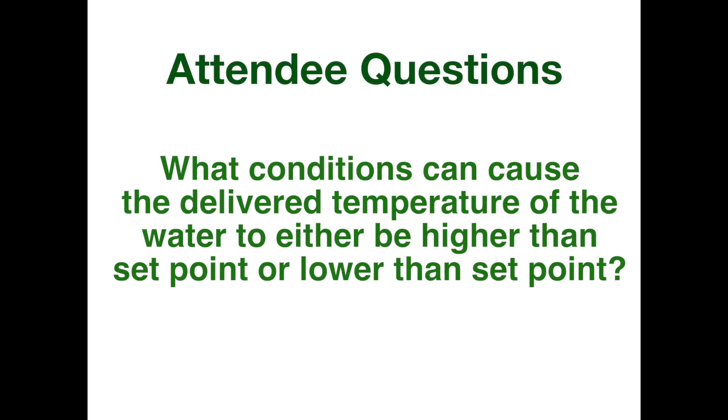So absolutely, I can have a higher water temperature on the upstream side of that mixing valve than my delivered water temperature. And I think we can say the same thing on a tankless water heater. We can dial it up to provide a 140-degree delivered water temperature out of the tankless, but then mix it down to a respectable, anti-scald mixing valve that would give us a delivered water temperature. So those would be two instances that would very easily have higher temperatures than the delivered water side.

Thanks for that. You mentioned earlier the term line of demarcation. Was that the term, as it relates to the number of tankless units? When we train on solar collectors, we use the same term that you don't want to exceed 6 solar collectors when you talk about flat plate in an array, because any more you start starving the internal risers, the ones towards the middle of flow, so it's more of a performance line of demarcation. I think you were using the term just to clarify as it relates to the number of tankless units in a commercial system.

That rule of thumb makes sense. You said 4 to 6. It's not from a performance issue - you can put together quite a few in parallel - but it's more of a financial issue. Is that what you were talking about?

Absolutely. It's not about the inability of a tankless to produce the total domestic load - it's possible to do that. But from a first cost standpoint, that's what I was referring to as it pertains to the line of demarcation. If I get 15 tankless water heaters, just to pick a number, and I successfully install them, they meet the load. So what is the installed cost of each of those units with the gas piping, the venting, the annual service every year, compared to maybe 2 smaller heaters and 2 storage tanks from a first cost standpoint? In those instances, that is for the user to define what line of demarcation makes sense from a first cost standpoint.

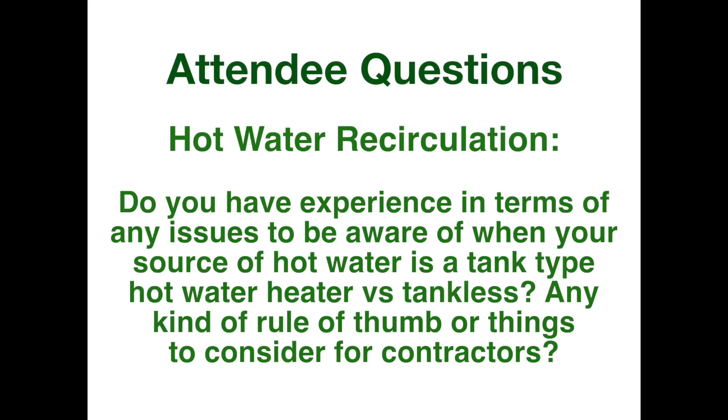Yeah, thank you for that. Speaking of those important check valves, a common misconception is that if you have a check valve on your recirculation - if you have a commercial system with a number of circuits you're recirculating through, in addition to the check valve on your main line, any risers going up to your fixtures also need to have check valves to prevent some strange things that happen temperature-wise in your risers. So not just the main circuit.